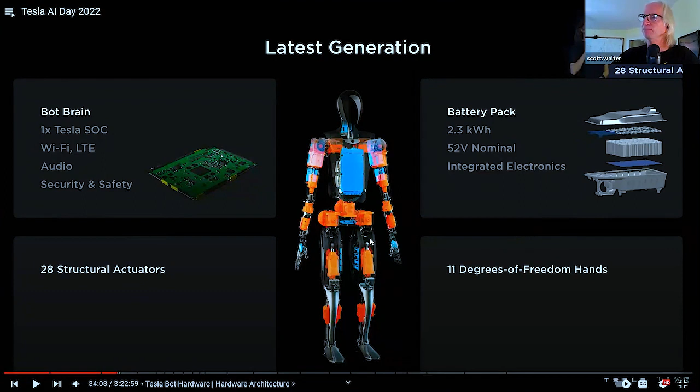Okay, so a lot of these slides I have, everyone might wonder, where'd you get that? All these are coming from the Tesla videos. This one is from AI Day 2. So usually I leave the marker up here, that's why, I didn't cut it off. So if anyone's really interested in finding it, you can go in and look at these presentations. So it's either the Investor Day or AI Day 2, or one of the videos they put out there to recruit for AI. So we'll be looking at some of that.

So this one is pretty good because it gives you an idea of what constitutes the Optimus robot. We can see all the servos that are here. We know there's going to be a bot brain, and this is what we're assuming is manufactured offsite somewhere and it comes in, and we'll have produced all these servos that we need. And there's the battery pack. Now, in this part of the presentation, Lizzie mentions that the battery pack is in the torso, and then she corrects herself and says, it is the torso.

So that's very important for us to realize there's not some torso we put the batteries in. The battery pack is the torso.

And this is probably being made in Sparks or somewhere else, where the Panasonic factory is in Giga Nevada, because these are 2170 cells. They're going in there with all the electronics and everything sealed in there. So that's going to come in as one sealed unit.

You're not going to have to put that together, but that's now going to be the torso that you build everything around. It points out the fact that there's 28 structural actuators, but really only 6 different types.

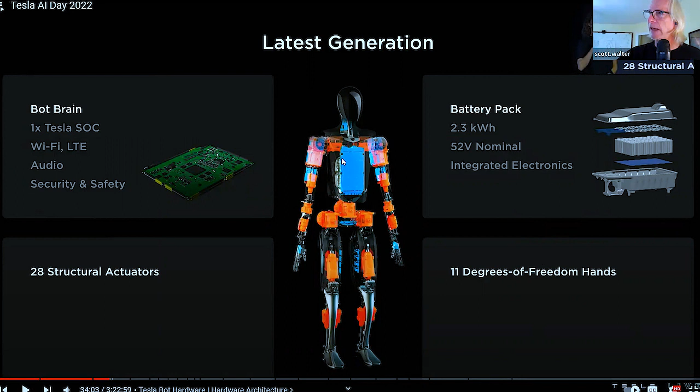Okay, so we've got that down there. And we go to the next.

So I just blew this up to make it a little bit easier to see what's going on, so they give you a bit more detail so we can see where the servos are.

What I want you to see is that this isn't one servo. This is actually two servos that are mounted at 90 degrees. Same thing here, same thing here, same thing up over here.

And as we go through, we're going to see some details of that. So those are the things that you're going to have to start putting together.

Okay, so how do we put it together? Well, this is a blow up of that battery pack that was in the upper corner in that presentation. This is the best shot I could get of it before it kind of opened up. So when they went to that slide, it exploded open. I was hoping to get it completely sealed, but that's as close as I can get it.

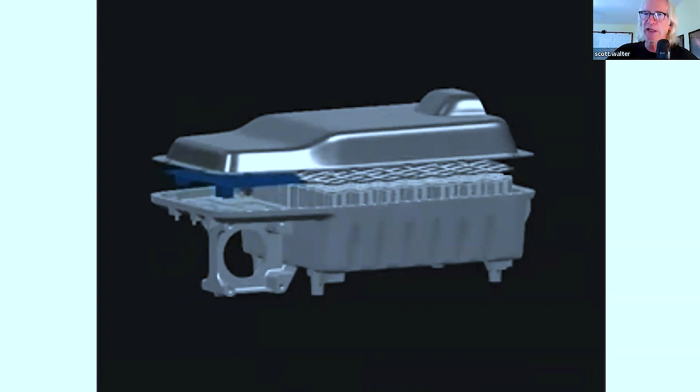So I'm going to take that pack, and I've rotated it in this image to show it against a couple of the other Optimus images so you can see where it belongs. This is the back side of it, and over here we have an Optimus. We can kind of see the ribs that match there. So we know it's sort of in here, and it'll become more obvious in this image.

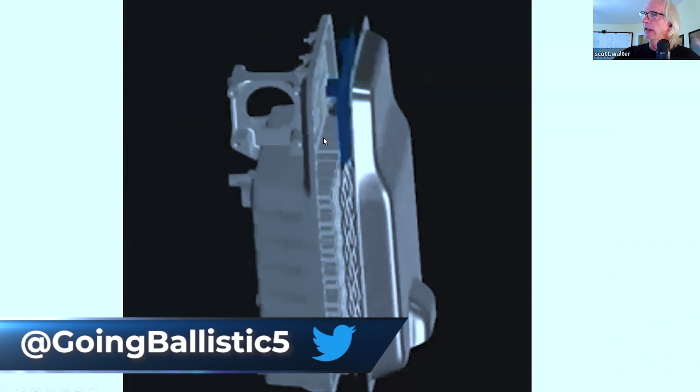Now I'm going to take this and stand it up. So we want to see what happens when we stand this image up, and I've now colored some parts of it. The yellow piece is the back. This here, what would you call that? It's kind of the collar, not quite the collarbone, but the head is going to be mounted on here, and the shoulders. That's going to be clear.

The purple part, that's the front-facing part. And right here where you see these little blue areas that I marked out, that's where they mount the FSD. So that's kind of where the chest plate and everything else is going to go. And the green bits in here, that's the batteries.

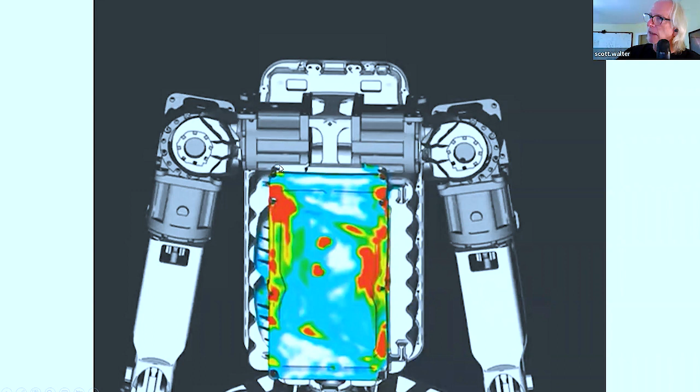All right, so now let's take a look at this image that was also in AI Day 2, where we can begin to get an idea of seeing what's going on here. So this whole chest area, of course, is where the battery pack is, and we can see how the arms are mounted on there. And right here, we can see these are the motors that are parts of the shoulder.

So if I pop right there and color code it, that yellow part that I was talking about before is right here, and the front facing part is right in here. So that there is the whole battery pack.

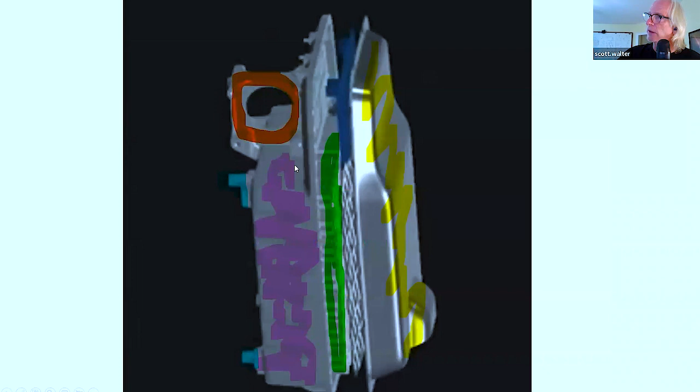That's your torso. So all you have to do is take this servo and mount it on there. I'm just going to go between these two so you can see that. So you see this kind of orangey red bit right here.

That refers to this bit right there, just so you can track what's going on. Now there's another image from the side to give us a better idea. So here we can see there's the torso battery pack. There's the part that sticks up. That's going to be where the head is going to be placed.

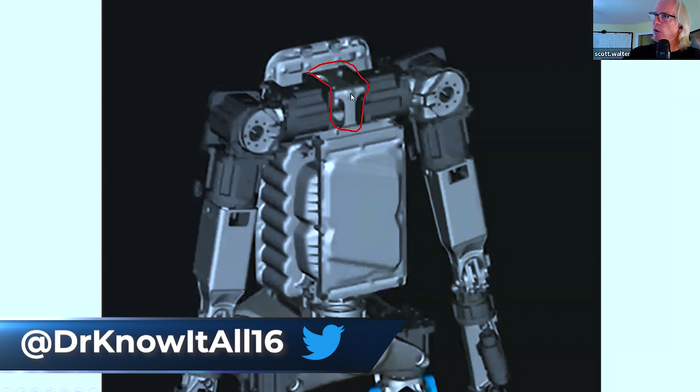The head's not in this image, but it gets mounted right on there. Again, we can see the motors that go right on here. So when they create the torso, these motors are actually going to be part of the torso, not part of the arm. And we see in the arm that's in the Investor Day video, that this bit is not on there. This bit down here is, but technically this is part of the arm motions, what causes it, but it really forms the torso.

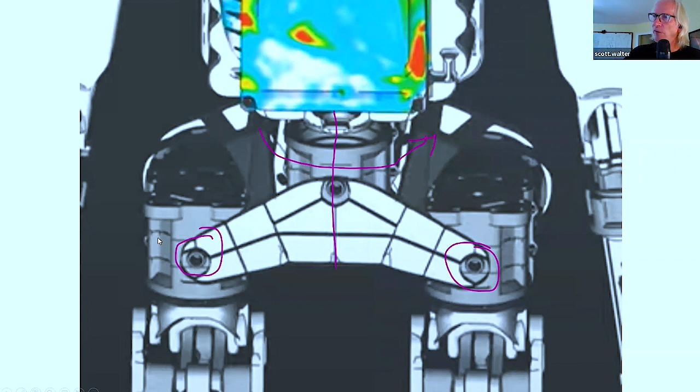And then your leg, again, when we look at a leg, what we are considering a leg, two of the motors aren't part of the leg assembly. They're already up here. Now, so we can take a look at that. This is what it might look like.

I don't know if they're actually going to have tools like this or not for being able to do it. It was probably there just to make it easier for the bot to be able to run this particular function, but we get a little bit of an idea of what it looks like opened up.

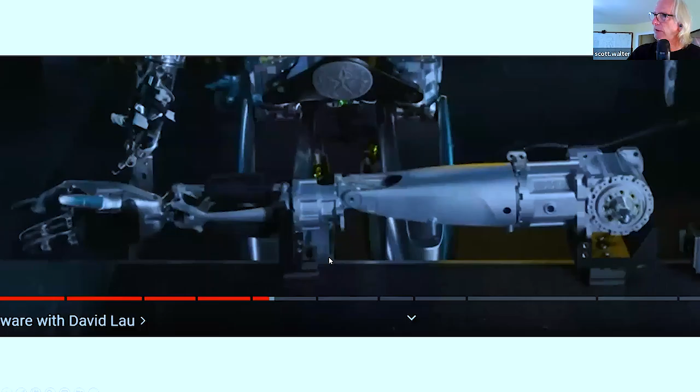We're going to be looking at the shoulder and how everything comes together. Let's break down some of the steps of what happened. At the beginning of that video, we end up seeing this arm, and we're going to get a close-up down here of what's happening with the arm. So I blow that up so we can see it a little better. So here's the arm, and I want you to look over here.

This is actually the second motor of the arm. Like I said, the other one is actually in the torso and needs to be mounted on there. Then we can see the rest of everything else here. So there's a motor here, and then it gets connected onto here with 1, 2, 3, 4 bolts.

How hard is that, Randy? Not even hard for me.

Yeah, done. And then you have a little bit in here, which is a structure, and there's going to be a motor mounted in there. I think this here is probably like the plastic housing that goes around it. So that's something that probably pops off and you get something else in there.

This motor here and this motor are identical. They are not different motors. They are absolutely the same. And the motors are actually designed to be able to snap together. It's kind of interesting that you would build a motor that way. This one down here is a slightly smaller version of these.

And then you come down here and you have the same kind of structure that you're going to put two motors on here and a few other things. We're going to get some close-ups to get an idea of what's going on. So this rotates like that - that motor's designed to rotate this way. The elbow rotates around here with a servo hidden underneath that cowling. Then we have the roll for the wrist, it actually happens here. And then these motors are used to make the hand move in pitch and yaw.

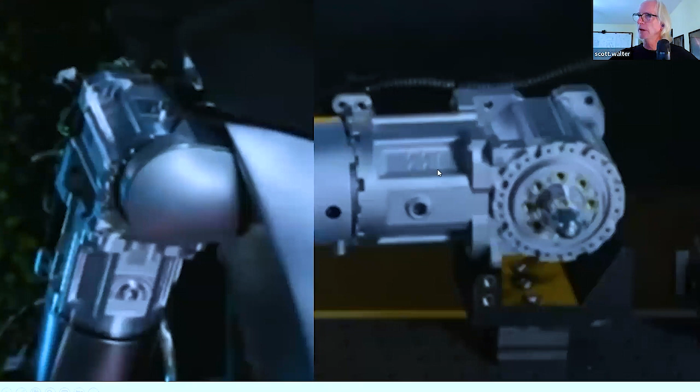Okay, so now let's get a close-up here of the arm outside. Let's see, okay, right here. I got to keep my fingers from hitting the scroll bar there.

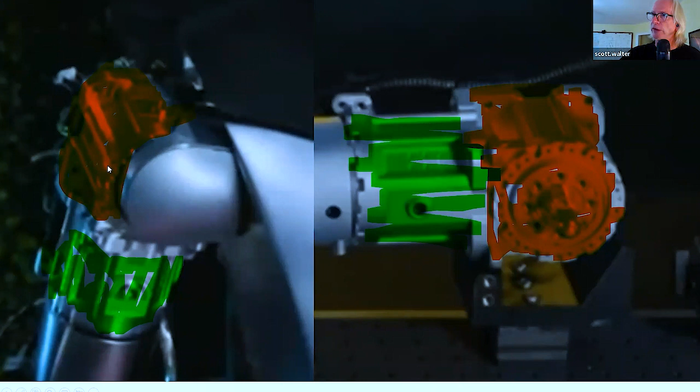So this is a close-up of the arm on the table, and we can see this motor here. And now we can see it mounted in Optimus when the job is done. If you weren't able to tell, this red motor here is this red motor over here, and this green motor here is that green motor here. And this is a little bit of covering over where it's been mounted, so you can't quite see what's going on, but we're going to see that in a second. So that's how this gets over into there.

Now, again, I just wanted you to be able to see that I highlighted a few features here. So you can see this feature here corresponds to that feature. This feature along here kind of corresponds to that. That little purple hole here I've got over sort of, so you can kind of match everything up.

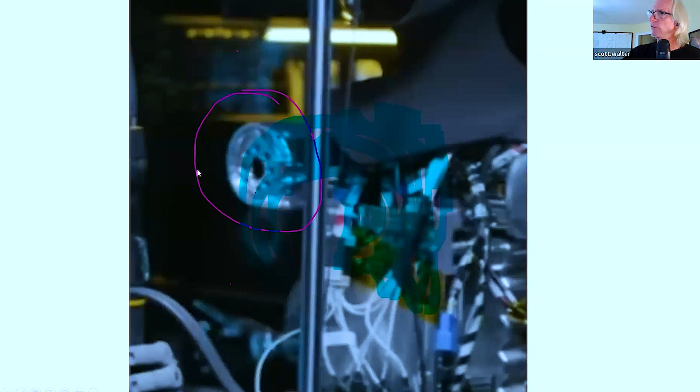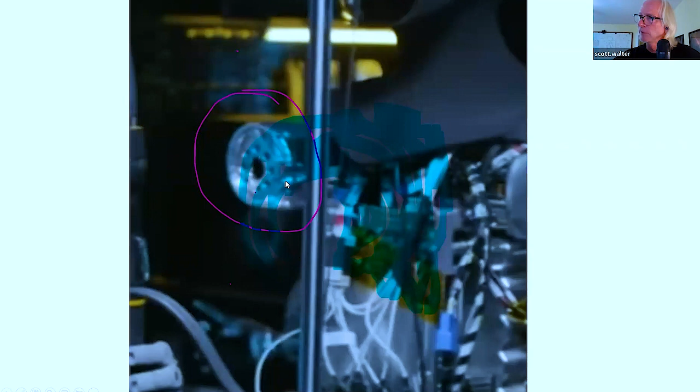Okay, so let's take a look here, the Optimus that's on the table is missing an arm, and we can see a flange right in here. This bluish area that I've highlighted, I'm just kind of circling that. So this is where the arm is going to come in. Now this flange is actually attached to the motor back here that we can't see, and I'm hoping we'll be able to see it when we get a close-up right here.

Okay, so right in here, this is the shoulder motor for the shoulder roll that's attached to the battery pack. And this flange is attached to the motor in the part that it rotates. So that sticks out, and we now need to mount the arm into the flange. So we can sort of see it coming together here.

Now you look at this little piece here. What do you think that little piece is? The connector? That silver piece right in the middle? No, okay. So I've highlighted little things here. The blue part here is the flange. We have the red motor here, the green motor here, and I've got kind of the purple motor here. Again, this is sort of part of that, but it's a spinny part of this thing here, which is fixed. And that silver part right in the middle, what do you think is the purpose of that?

You keep asking, and I still don't know. I mean, a lot of times you look at it, it's attached to the motor, so clearly it must be an axle, right? Yeah. No, it's not. It's a poka-yoke. What? It's basically, it's not actually part of the motor, it's not part of the motor design. It's a cap that they pop on there to make sure it's easy for Optimus to pop it in. It's just so inserting that into the hole is a lot easier. It's there to line up the holes, to help you line up the holes.

That's it. So you can see here, there's 8 holes in here, and they're threaded holes behind here. And this is the mechanical interface between this flange and the motor behind it. And the whole idea of this connection is that when this motor here rotates, the outer part of that motor moves and the inner part stays fixed to this flange.

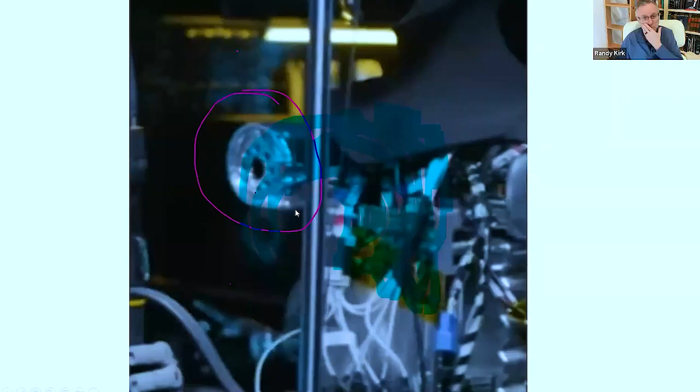Okay, so if we go back a little bit to this here, a lot of times when you look at a motor, you just imagine a little axle that comes out and that's the whole part that rotates. No, no, no, no. You see that green arc there? I should make that a big full circle. That whole bit rotates, the entire bit. That's your mechanical interface right there. This serves absolutely no purpose.

And it's actually, if you look at the motor designs, and I think when we get down one of them we'll look at it, it's not in any of them. It's not there. So it's probably just a temporary thing that they popped in just to line up the holes when you decide to create the mechanical interface. So you just put in 8 bolts to lock it in.

Okay, now the interesting thing about this is that this is coming in from behind. Rather curious, right?

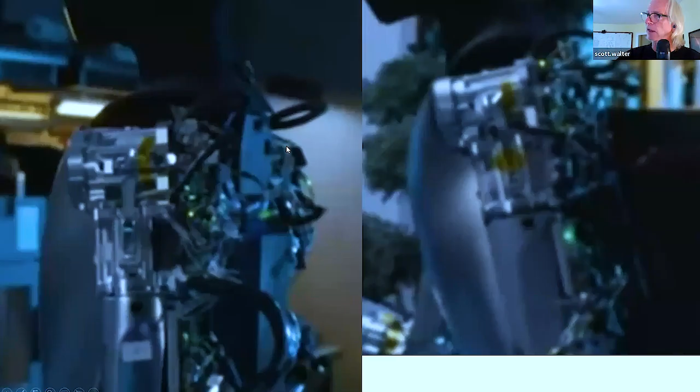Because you might be assuming that, oh, there must be a flange behind there, and we're going to see whether that's the case here. I highlighted some of these things to make sure you could identify the different sections. But we get very few views of Optimus from behind, it's really rare we get anything, so this is like the closest. It's a little bit fuzzy, but looking around at these motors, I don't see anything that indicates there is another plate back there, or another flange that it mounts to.

So again, I'm highlighting the different parts. That's the mounting flange here, and that's the motor itself that we can see in both of those.

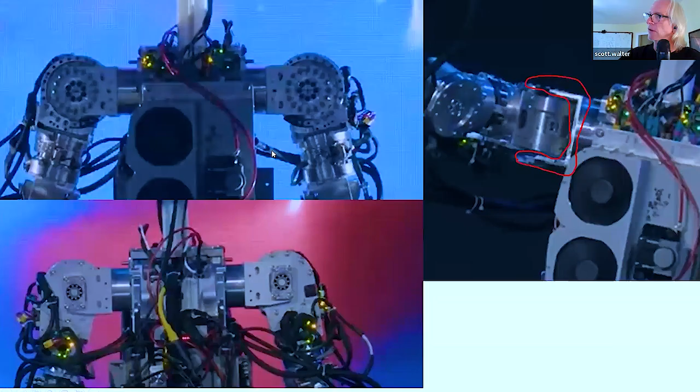We go back to AI Day 2, and this is Bumble C coming out, the bot that walked for the first time without a harness. We can see up here at the top, this is the bot moving towards us, and the bottom one is the bot moving away from us. So this is the back of the bot, and this is the front. We can sort of see that they already were thinking very much. I'm really surprised at how close this is to their final idea. There's some little design changes, but they really already were thinking of certain things and how they're going to be done, and they've kind of stuck to it.

And again, these motors to me look like they were not off the shelf. These are ones they may have had to already make, an early prototype with some of them.

But if you look here, you can see there's a flange mounted here on the front side, and there's also one in the back side. So the motor is in two places. And if you look at it, when the bot puts the arm up, you're able to get a view when it rotates. You can see that motor in there and this flange here, you see that kind of C right in there. That's connected to that motor, which means it's mechanically attached on both ends.

The current design, it's not, it's only on one side. And that's sort of interesting, because it means it's mechanically more cantilevered as opposed to being stabilized on both sides. So it's a little bit heftier over here, but it's easier to assemble. You just come in from behind and you just pop it in. So again, it's like if they really were thinking of having humans do it, they'd have a little fork that you would put it in, but now they got rid of it. So you come in this way with it because it might be easier for Optimus to put together. It's rather interesting to see them evolve the design that way, and that decision may have been a little bit cheaper.

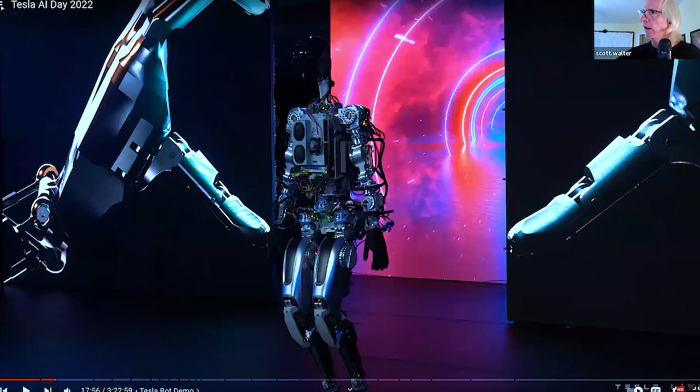That flange that you have on there is able to handle some of the torques you're going to get. So, and then now here, I brought this up because again, I wanted to highlight, you see the motors down here on the legs?

Yep, you could see those were off the shelf. It's like they were just trying to see what they can get, and they're like, holy cow, we can't find what we want. They're kind of close, but they're not quite where we want. So it was enough for them to be able to get this project up and going. But it seemed to me that these here may have been very early prototypes of the servos that they came up with on their own.

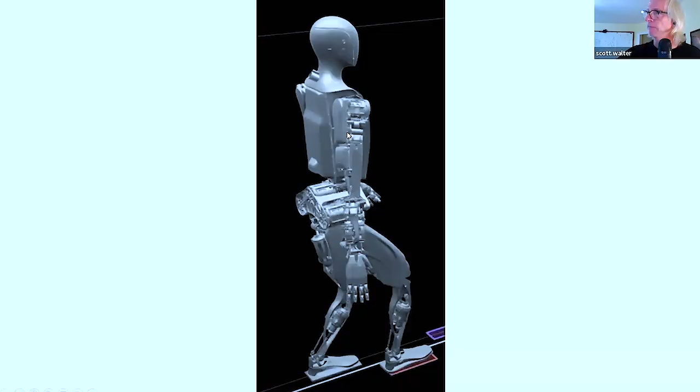And this here was just to get, so this is just another image to kind of show us what the backside is. It's the closest I've had of a backside, but it's in an animation. Part of the reason I put it up here is that the first thing everyone's going to say is, oh, what's that right up there on the neck? Is that the charge port? Because we keep on wondering, is that where the charge port is?

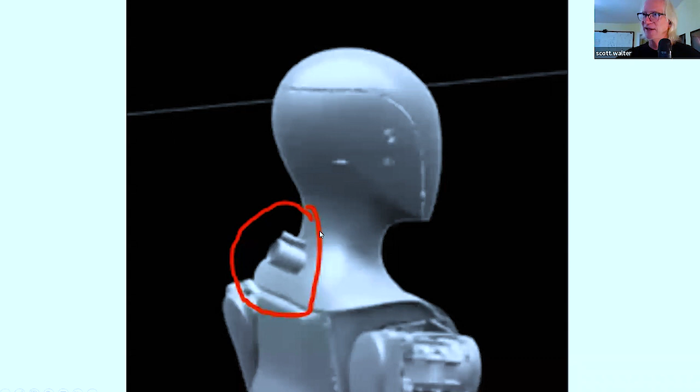And I was like, actually not. You know what it is?

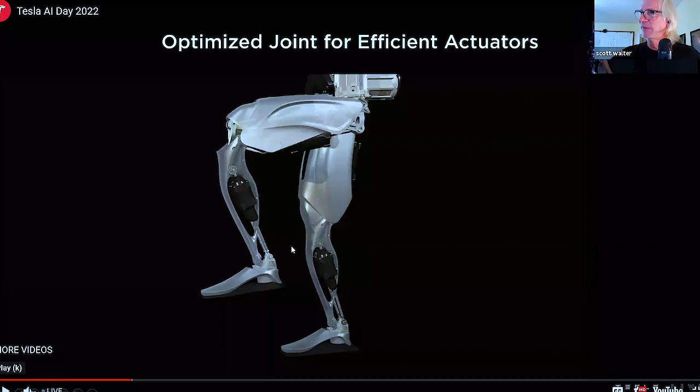It's the kill switch, or let's call it the e-stop. If you notice, right on the back of Bumble C there was an e-stop. Now what's interesting is some of the other videos showed a Bumble B, and you can tell because Bumble B's neck material is black instead of silvery, and it doesn't have the e-stop in the back, if any. So they probably realized, hey, we're going to need an e-stop for this, aren't we? Usually you'd want some way of being able to stop it. So yeah, that's where you have to go.

Now if we look at the legs, the lower legs, we can see a bit of the pelvis up there. Again we can see those two motors mounted at 90 degrees to each other. Very easy to put together. That whole pelvic girdle is, I think, really easy to assemble. You'll have a couple of wires you snap in here and there, not going to be tough. Then probably the most complex part is going to be the thigh, or femur section, the upper leg. Getting down here, we can see the insides a little bit, and it's a bit more mechanically intricate, but still nothing hard to put together. So that's what would be the most challenging.

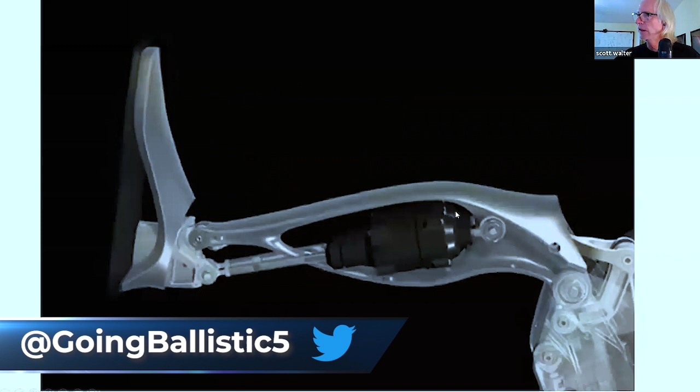The lower part won't be that bad either. We can go in here and take a look at the lower part and say, all right, you get the foot, there's not much there. You've got a couple of little pin joints that are probably very easy to put in. At most you just tap it through, and then you probably just tighten it. I don't think you need to press fit it or anything. It's probably just going to go in with a hex nut or something, and that's more than enough.

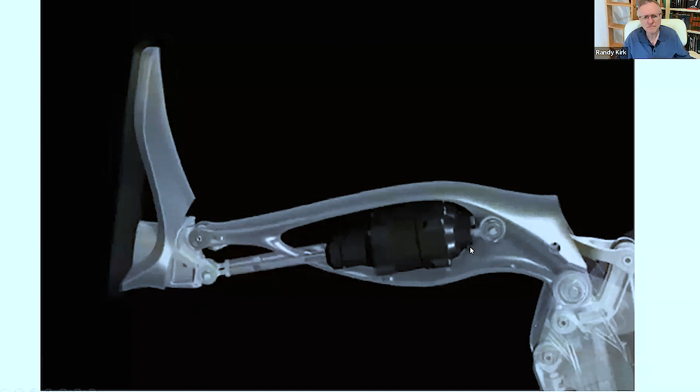Do you see anything here that looks like it would be a real challenge to put together? Because this is the whole assembly right there. Yeah, you get that servo, pop it in that axis, then down here they get pressed in. I don't think it would be that hard. Yeah, that's the lower part. And then we move to the upper part here.

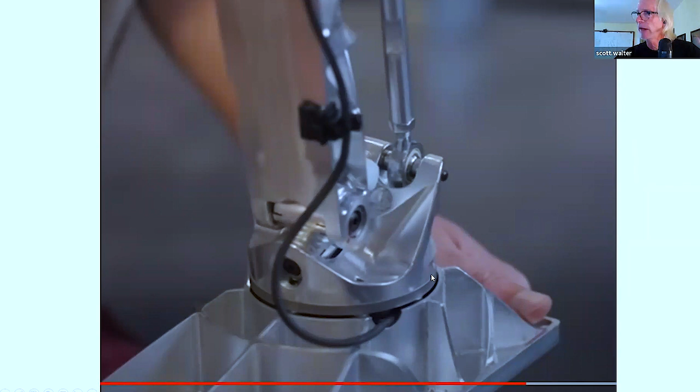Oh, here's some actual physical footage of the real thing. But again, this is the prototype of the latest version, so this is not Bumble C. This is right after Bumble C, where they're already playing around with it. And again, you can see it doesn't look like it would be that hard to put together. I'm looking at this, like, is that a hex head there? And to be able to assemble this, that's pretty easy to put together.

It's rather interesting, you see this here? I don't know, did they weld that together and buff it, or did it come out of a casting and they had some flashing they needed to remove because someone was really aggressive with the sandpaper or the grinder going through there? And then you see these parts here, like, oh, 3D printed. There's nothing here that looks hard to manufacture, and really not that difficult to pop together and assemble. I think it's probably a one-person job.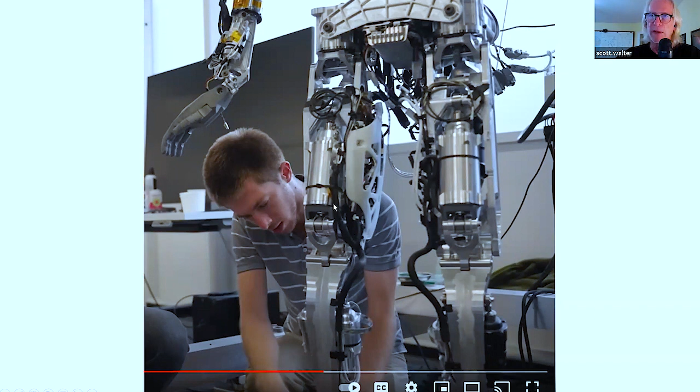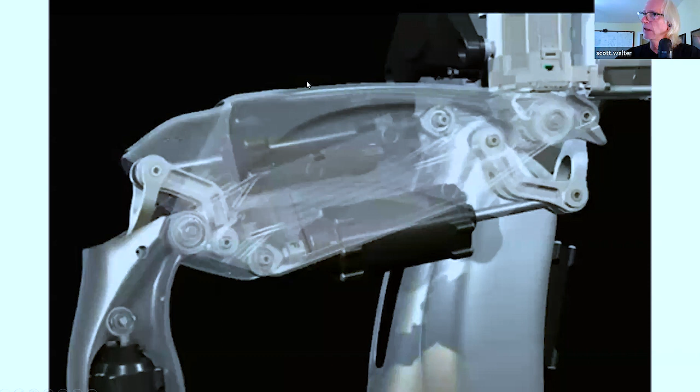I'm not even sure you need two people to do a lot of this. Yeah, and again this is an early prototype. You can see something made out of an aluminum billet on a CNC machine just to test it out on the hand. But again, there's nothing super sophisticated. This is probably the most mechanically intricate part right there. I think this is the one that takes, I don't know, 90 minutes or so, the one that takes the most time to pop them in. But once you have the procedure, I don't think it's that hard, and then you connect everything together.

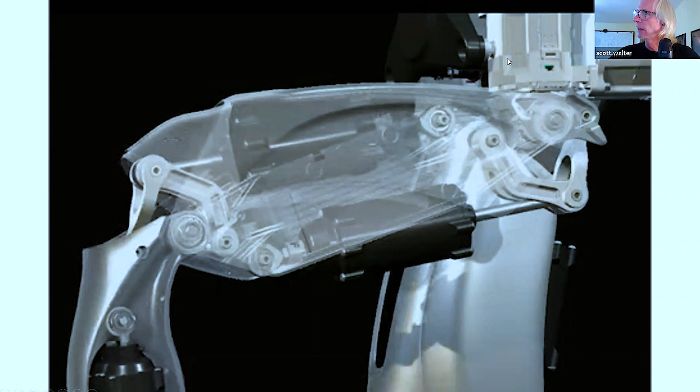You might have a couple of fixtures or jigs to hold things in alignment the way you need, or hold it in a certain place. And then you just pop it in and you're done, and that attaches to the pelvic girdle right there.

Again, the left and right leg are the same, they're just the leg, and the arms are just the arms. You just have a left and right hand that you pop on there. And we can see this mechanism - I don't see anything that tricky in it.

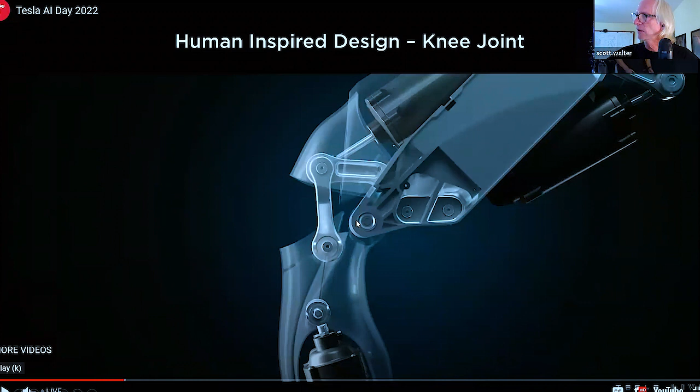There's nothing that's going to be that hard to put together. And if you worked in your garage, you've seen things like this - crankshafts and stuff like that.

Sure. And how hard were they for you to be able to take apart and put back together? You don't want to ask me, I'm the worst mechanic ever, but yeah, me too. But eventually not that hard.

But for the motorheads out there that would say we see something like this under our hood all the time, you'd probably say that's not that hard. You just go in, knock the pin out, do something else, bring it in there, tighten it up, give it a little lube, whatever, and you're done.

So then it'd just be running some wires through there. But at that point they'll probably have figured out the whole harnessing system and the ideal way to run everything, and everything will just be coming right on in, snap, and you're done.

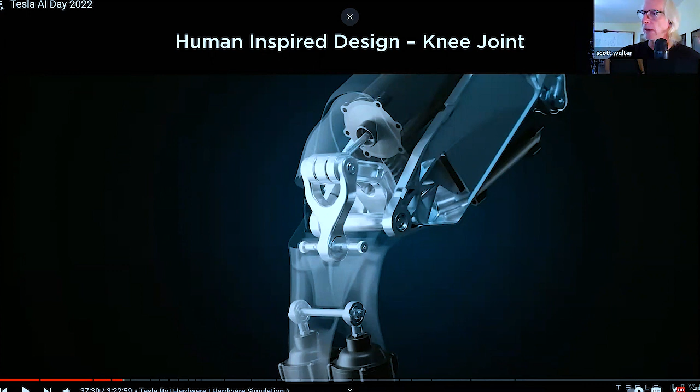So you wanted to make sure that you've got - the bigger the mounting flange, the more mechanical stability you're going to have there, as opposed to trying to tie into an axle, which is going to slip, and you've got the pin that you got to put in there to rotate. Well, this is much better.

So they eliminated a lot of parts from what you would expect, because they design these things to kind of plug together. They design the motors to have exactly what they needed for that and not more. So there's definitely some advantages.

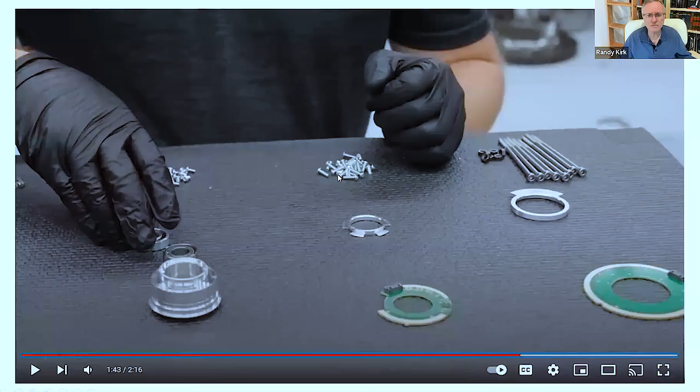And now here's some pictures, this is from this recruiting video they had that was like about 2 minutes long. I think this is pretty old, it probably goes back to summer, just showing them putting together a servo.

So these are the pieces that you need. Got a couple of bearings here and there, a couple of things they probably had to make in the shop themselves, on a turning machine or something like that. They've got a couple of circuit boards that evidently they can make themselves because they're able to.

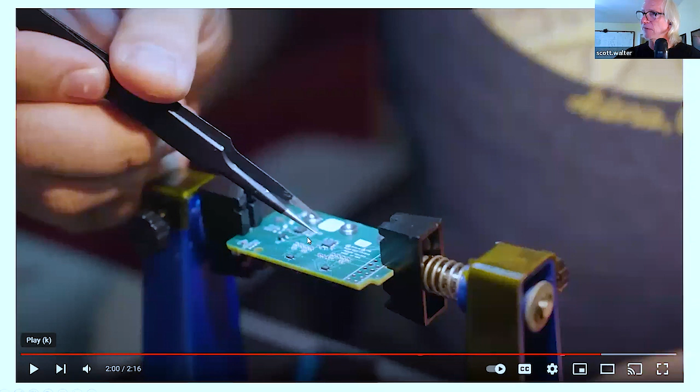So coming up with these boards, it's not like it's that big a deal, they just buy the chips and then make them however they want. So again, that's something I think they're doing in-house.

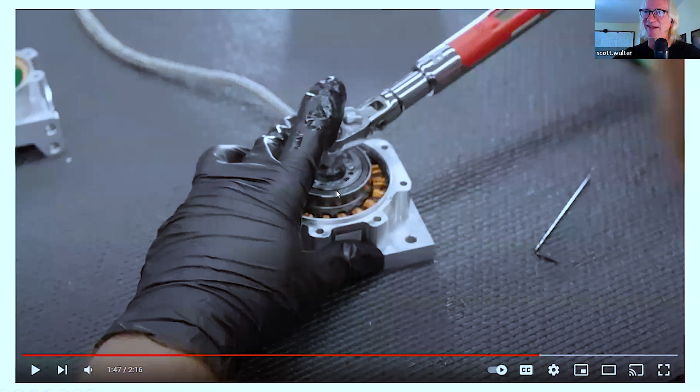There we go, putting it together, standard wrench, nothing really special. Put it on there. Look at this thing here - like I say, from IKEA, probably.

And if you look at this, eventually this will probably be a cast part that's then machined on the inside, just turned to the inside to make sure it's good. And these holes - but this is probably coming from an aluminum billet.

And they just run it on a CNC machine right now, so it takes a little bit of time to do that, but it's not like it takes forever. How long do you think it would take for a CNC to knock out that part? You're asking the wrong guy, I've watched it being done but I have no idea. But not very long - oh yeah, I think under an hour.

I mean, it might be like 20 minutes or something, because there's not a whole lot of material being removed, and it's aluminum, which is really easy - really, really easy. I think you could do that just with a very simple billet.

And there are other ways to manufacture faster to kind of get something close to the shape you want, and you do the final machining.

So again, a close-up of that, how hard does that look to manufacture? I mean, these windings here are probably the hardest thing to do, but I think they've got probably some equipment that already makes things like that. Again, looks like it would not be that hard to manufacture.

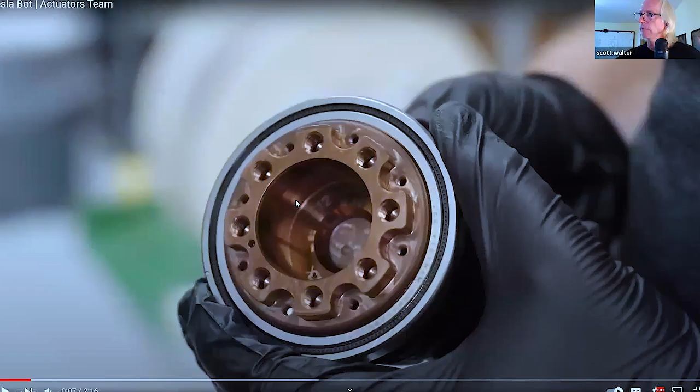This here is showing the inside. I'm assuming it's copper or brass or something like that. I don't know if it's for conductivity reasons or because it's a bit harder than aluminum. And I'm thinking it's because you don't want the threads to strip. So if you need to have a certain amount of loading on it, you would probably decide to go with that. And the reason I'm thinking they're making it out of a different material is if we go back just a little bit.

This is the one that only produces 20 newton meters of torque, and they're showing it silver, almost like that's probably made out of aluminum, because that's okay. It can be made out of something light and soft. But up here, because we're going to be delivering like 5 times more, 5.5 times more, we might make it out of some slightly sturdier stuff to be able to handle it. It doesn't have to be stainless steel or anything that hard, but probably something a little bit more.

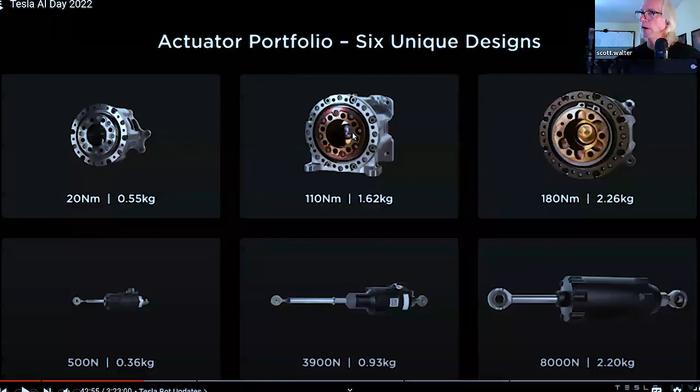Okay, so I think these are just showing all the different types of actuators. That's actually like everything I think I had, believe it or not. Did I do that in record time? In record time. Any slides you'd like me to go back?

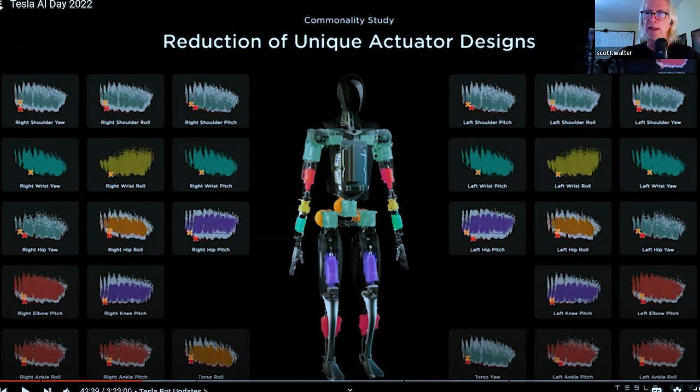So your impression is, how hard would it be to put the bot together? That was my first thought when I was trying to imagine how hard is it to get from here to there, to get from a prototype, as Elon likes to say, prototypes are easy, production is hard, but how hard is it really in this particular case to go from a prototype to production?

And so again, because I do have experience in manufacturing, I started thinking, okay, they got some plastic parts and some metal parts, they got some motors, actuators. They've got these various, but those are known issues. These are things that have been built before. It's just a matter of building them the exact way they want them, or buying them off the shelf if they can buy them off the shelf. So all of those specific parts get lined up like an IKEA project or like a Lego project. You lay them all out.

And now how long does it take to put all that together? My first guess in my head was maybe 3 man days. And then that's when I said, no, I know the guy to ask. So I hit you up and you said, no, it's pretty easy.

And it's a question of when they do it. It's quite common in a manufacturing environment for them to do something called kitting, which is very inefficient, because somewhere off on the side, you've got people who are taking all the pieces you need and laying them out. So the analogy is that when you go in the dentist's office and you're going to have a procedure, the assistant comes in with a tray with all the pieces that the dentist is going to need. They're already kind of laid out. But they had to go over and get that stuff together.